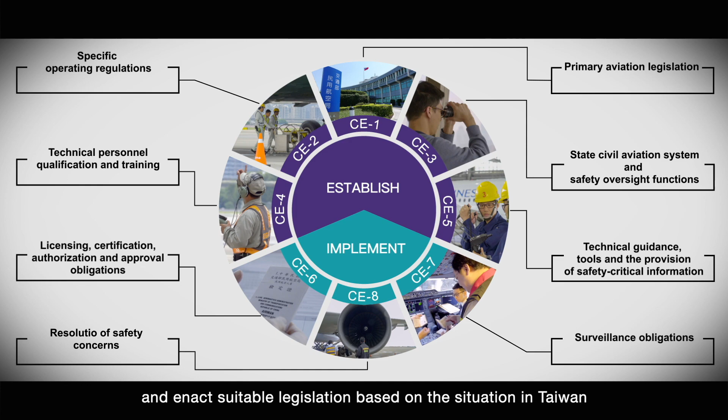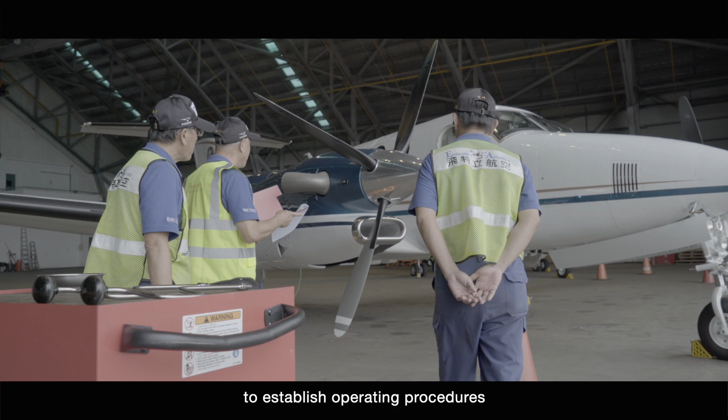The second step is to implement all laws and policies into procedures. We require airlines and all other aviation service providers to establish operating procedures and ensure strict compliance by employees. These serve as guidelines for self-audit and safety management.

The CAA also continues to supervise national civil air transport enterprises in accordance with their safety performance and scopes of operation. The civil air transport enterprises shall set up certain safety performance indicators and targets, and report on their achievements and improvement actions on a regular basis to control flight safety risks effectively.

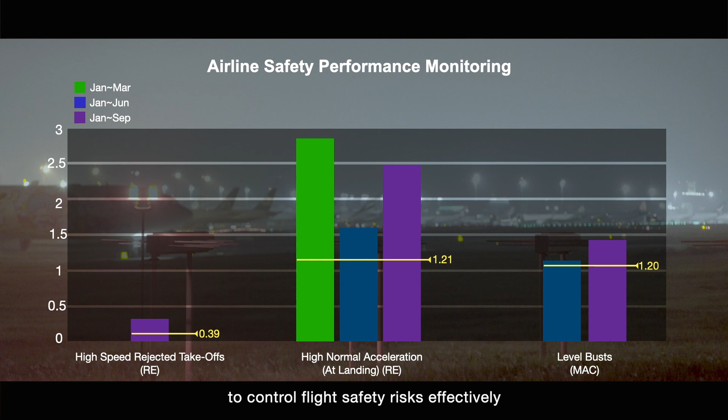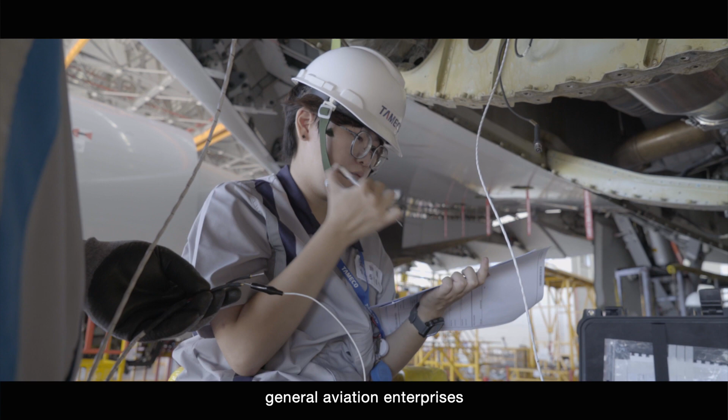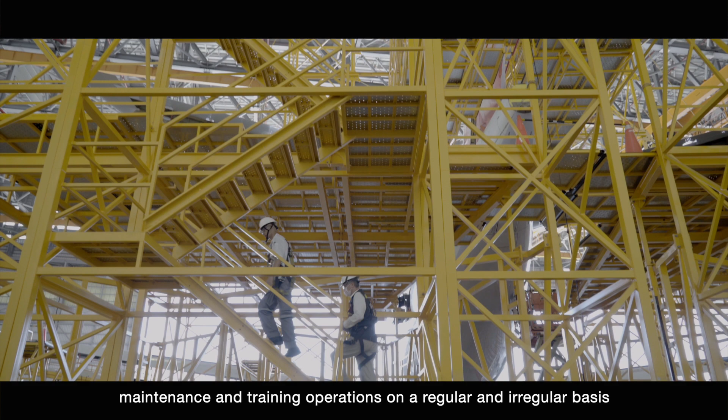The third step involves systematically implementing the safety oversight system. The CAA established a flight safety oversight system to implement inspections on civil air transport enterprises, general aviation enterprises, repair stations, and civil aviation training institutions in their flight, maintenance, and training operations on a regular and irregular basis to ensure their operations fully comply with laws and regulations.

The CAA also sets up qualification requirements and inspection procedures for safety inspectors. By conducting comprehensive training, we could enhance the ability of performing safety inspections. It is our expectation that by implementing a comprehensive flight safety oversight system, we create a safe environment with aviation service providers.

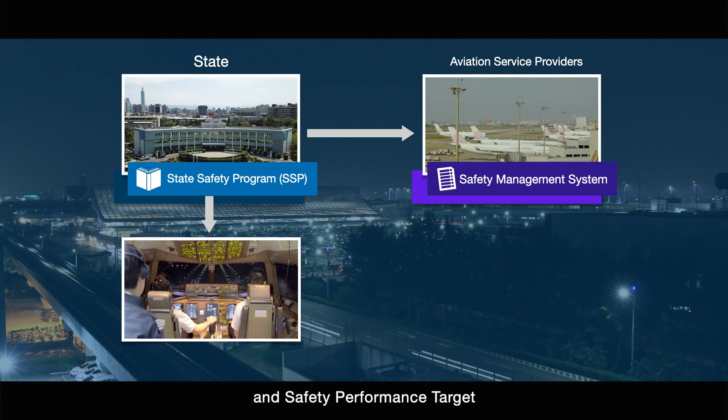Taiwan has established and implemented the State Safety Program. We supervise all aviation service providers and ensure that they follow the safety management system for implementing flight risk assessments, and set up the Safety Performance Indicator and Safety Performance Target to systematically identify hazards and manage risks.

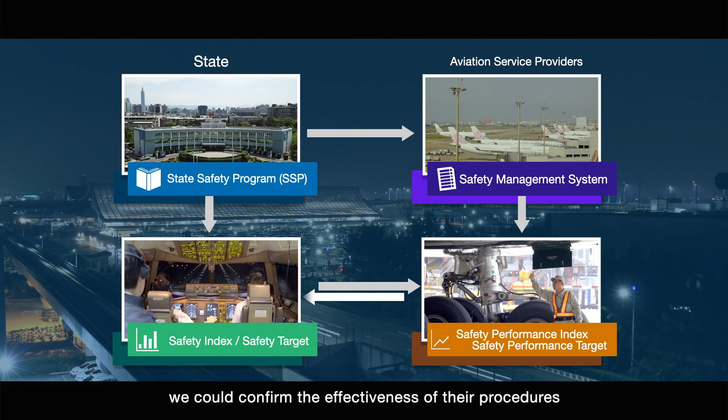Through continuous monitoring and regular assessments, we could confirm the effectiveness of their procedures, eliminate the occurrence of medium and high-risk incidents, and maintain overall flight safety.

The CAA oversees the Taipei Flight Information Region and is responsible for managing the immense air traffic in East Asia. The air navigation and weather services use radar, radio, and automated equipment to provide air traffic services and information for all aircraft. They help all flights take off and land safely in an orderly fashion, and continue to establish and replace navigational equipment to meet international flight safety standards.

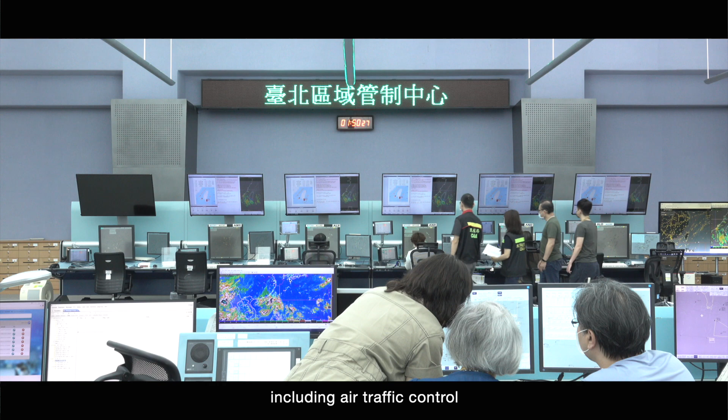The CAA visits air navigation and weather services each year to implement system inspections, including air traffic control, aeronautical meteorology, flight information, aeronautical telecommunications, maintenance of navigation facilities, and other inspections, thereby ensuring the quality and efficiency of flight services in the Taipei Flight Information Region.

Airport ground safety is also crucial for flight safety to ensure that the runways, taxiways, aprons, and other airside facilities meet international civil aviation regulations.

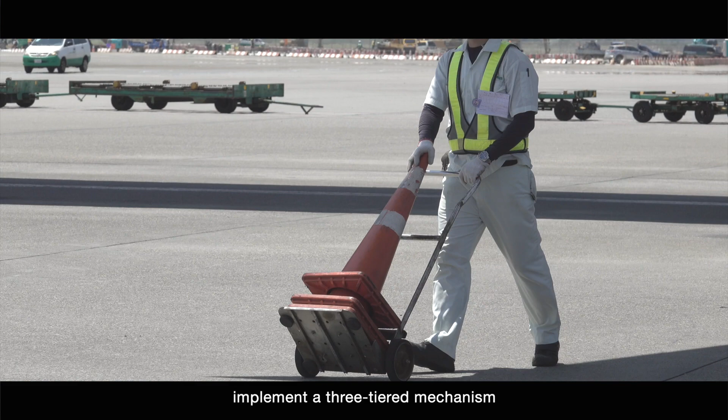We require airports to implement daily airside inspections and safety maintenance, and implement a three-tiered mechanism to supervise and manage the operation of airport ground handling service providers.

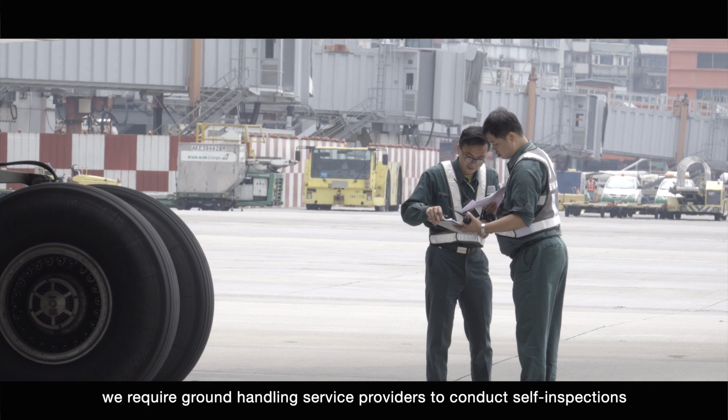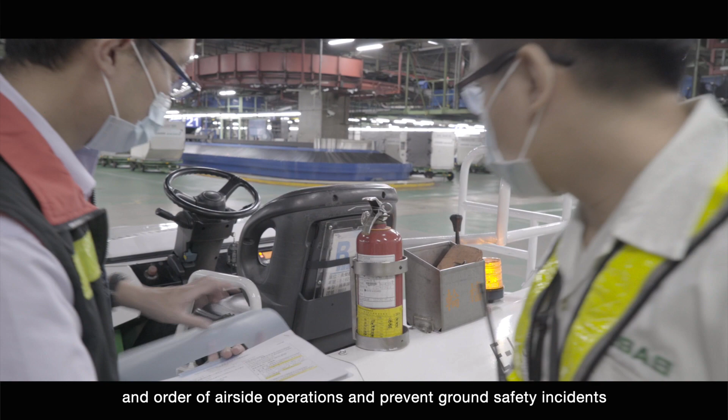First, we require ground handling service providers to conduct self-inspections. Furthermore, airports also inspect the apron operation of ground handling service providers. Finally, the CAA supervises and inspects airports and ground handling service providers to ensure the safety and order of airside operations and prevent ground safety incidents.

As the threat of terrorist attacks persists worldwide, to prevent unlawful interference from jeopardizing civil aviation flight safety, strong aviation security measures must be rigorously implemented.

The CAA has established the National Civil Aviation Security Program and set up aviation security measures to protect airports from unlawful interference. The CAA also requires the Aviation Police Bureau and airline companies to establish aviation security programs and implement aviation security operations.

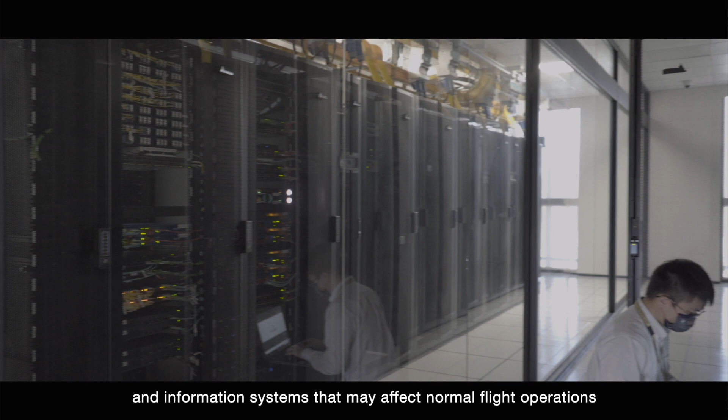To enhance network security and prevent damage to network and information systems that may affect normal flight operations, the CAA incorporated International Aviation Network Security regulations into the NCASP and requires operators to follow the regulations.

In terms of the safety management of airports, when entering or exiting restricted areas of airports, all personnel and vehicles are subject to rigorous security inspections.

Advanced surveillance systems are also set up in areas around the restricted areas of airports to deter acts that threaten flight security. All airside and surrounding areas of the airports are monitored constantly.

Bringing dangerous items on board an aircraft can severely affect flight safety. All safety inspections before boarding are based on international regulations on whether passengers and crew members have brought or transported dangerous items.

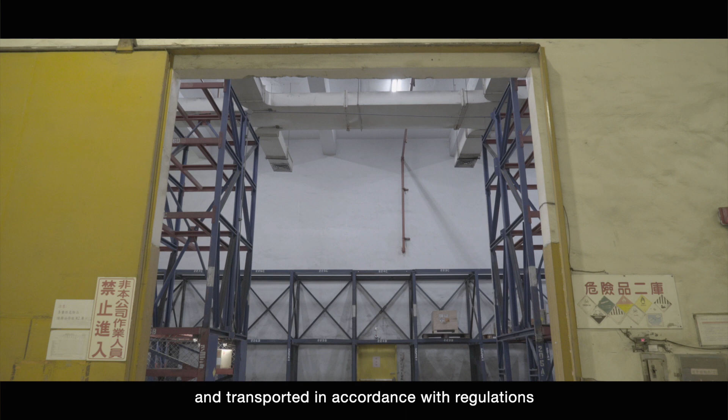Furthermore, the transportation of dangerous items by air requires approval. They must be stored, contained, and transported in accordance with regulations to ensure safety during transportation.

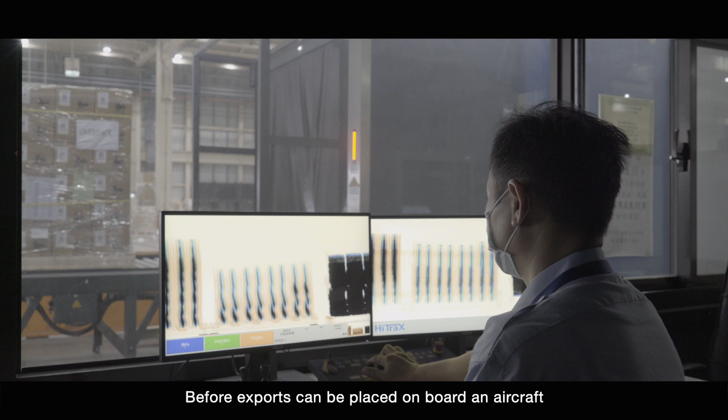Taiwan has implemented safety inspection measures for 100% of exports by air freight. Before exports can be placed on board an aircraft, they must be thoroughly inspected using X-ray and explosive trace detection.

The CAA visits airline companies, airports, and other security units for audits with the aim of strengthening aviation security and the management of dangerous items in air transport to fully improve flight safety.

When an aviation safety inspector discovers any deficiency during inspections, he shall immediately request the operator to implement improvements and register the inspection report in the Flight Safety Management Information System.

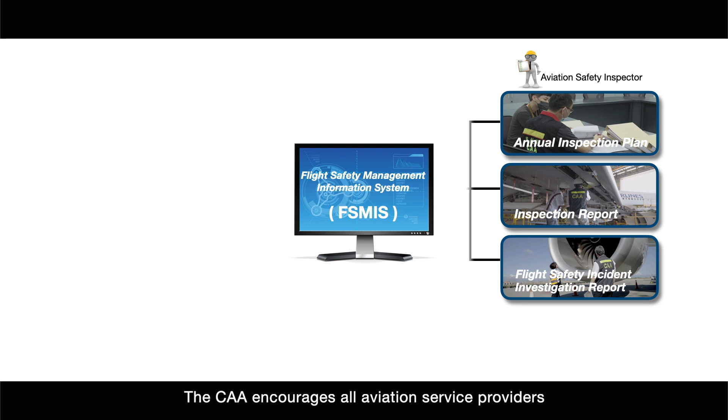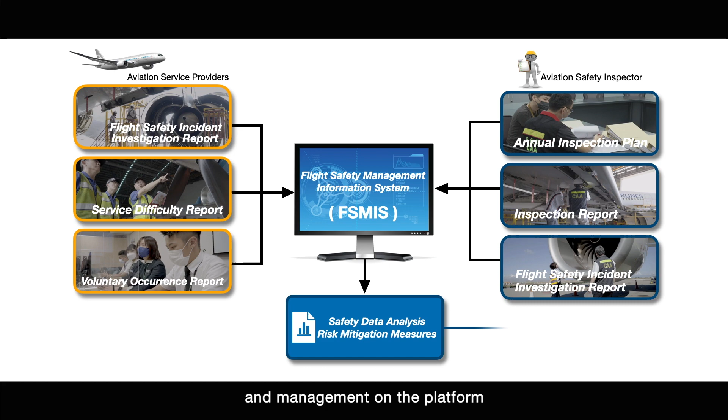The CAA encourages all aviation service providers to immediately report any incident that may affect safety. The data collection, analysis, and management on the platform helps create more comprehensive flight safety information.

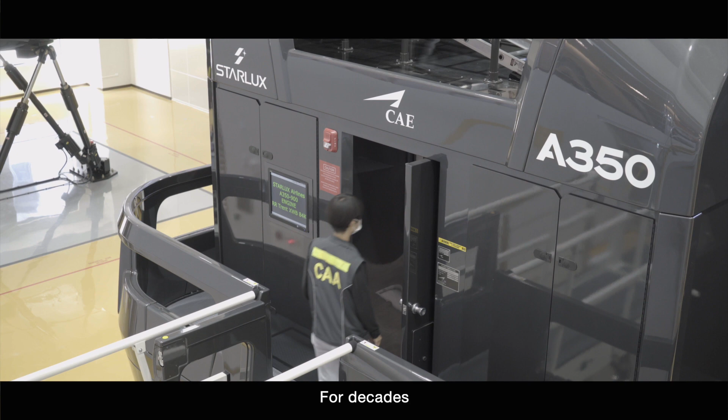Flight safety is based on comprehensive supervision mechanisms, and the supervising personnel are the core of this mechanism. For decades, with the joint efforts of CAA and all aviation service providers, our safety performance has been maintained higher than international standards. Looking towards the future, the CAA will continue to intensify flight safety oversight activities, improve overall flight safety,

and enhance flight security and counter-terrorism operations to ensure flight safety with aviation service providers. The safety of every flight is made possible with the support of the CAA. Civil Aeronautics Administration makes flights and your trips safer.